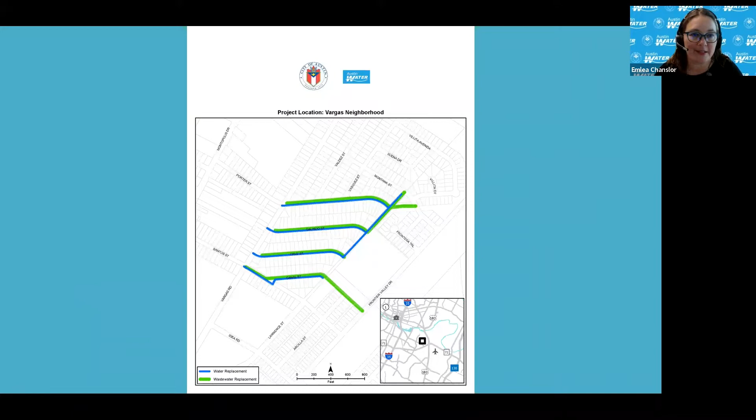On your screen, you should see a project site map of the location that we are going to be working on. The lines in blue are the water replacement lines, and the lines that are green are the wastewater replacement lines that we will be doing. I'm going to briefly talk about the project, and first I want to go over the actual street locations so that the residents are aware of what streets we will be impacting.

So we're going to be looking at the homes, the residents on 6,700 to 6,814 Canal Street, 6,600 to 6,705 Santos Street, 6,600 to 6,816 Cruz Street, 1,200 to 1,305 Lawrence Street, 6,600 to 6,825 Porter Street, 6,600 to 6,814 Galindo Street. So if you live within one of the residences or homes located within those street addresses that I just mentioned, that is the location of this project.

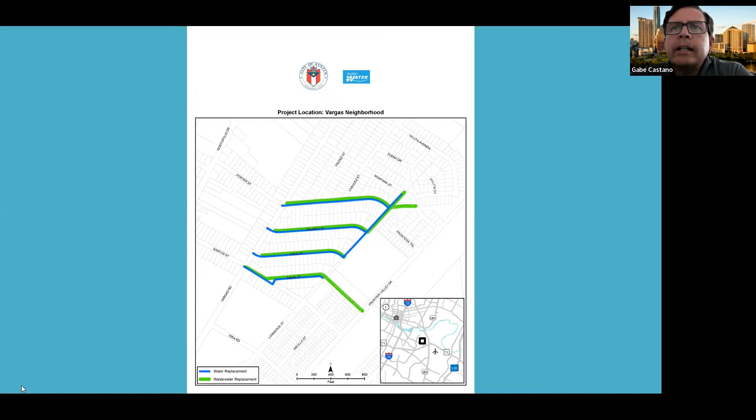So basically, we will be working on approximately 11,200 linear feet of 8-inch, 12-inch water and wastewater main pipes and lining 911 linear feet of 10-inch wastewater main. So our goal in this project is to replenish and replace existing infrastructure that is out of date and bring it up to new standards for the residents in this area. So we will be working on these streets to replace the water and wastewater.

So this project will primarily replace and update approximately 5,876 linear feet of water and 5,325 linear feet of wastewater lines. In addition, 12 fire hydrants will be replaced and some will be replaced in new locations to meet current spacing requirements. Construction is expected to start in August 2022 and will take approximately 13 months to complete. Roads will be resurfaced after construction is completed.

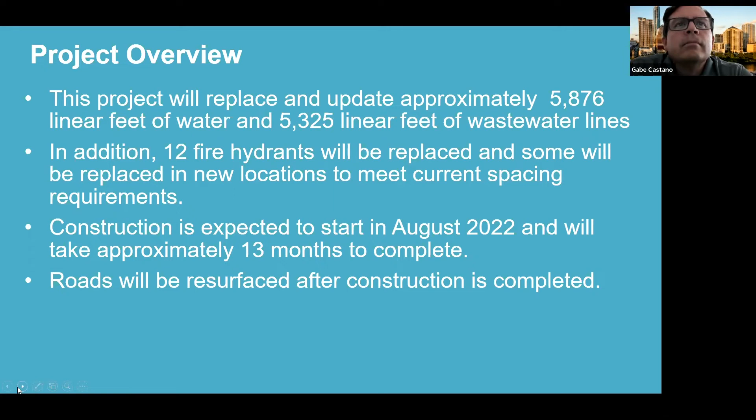And also, as I mentioned a little bit earlier, we'll be doing cured in place pipe lining, which means we actually will leave that line in there and we'll put brand new infrastructure within the existing pipe, so as not to disturb the ground, and also any of the residents or existing utilities that are around that pipe.

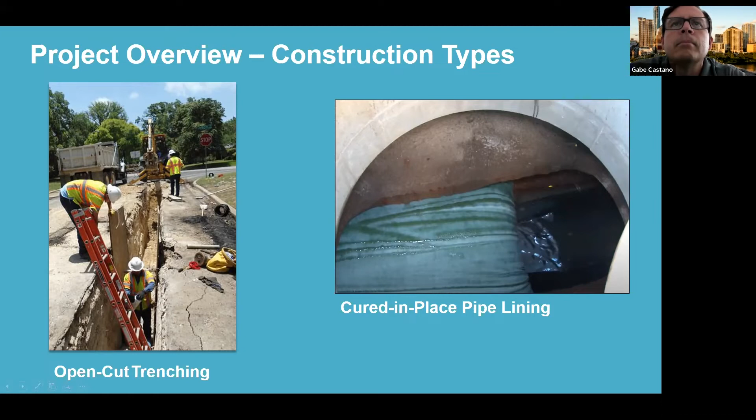So what to expect during construction? So, construction overview: the contractor will use heavy equipment to dig trenches for the new water and wastewater lines. The roads will be patched after the line is installed. All roads will be repaved at the end of the project.

During the construction phase, crews will work in front of your property a number of times to complete each phase of the project, including excavation, pipe installation, temporary paving, testing, repairs, if necessary, and final paving.

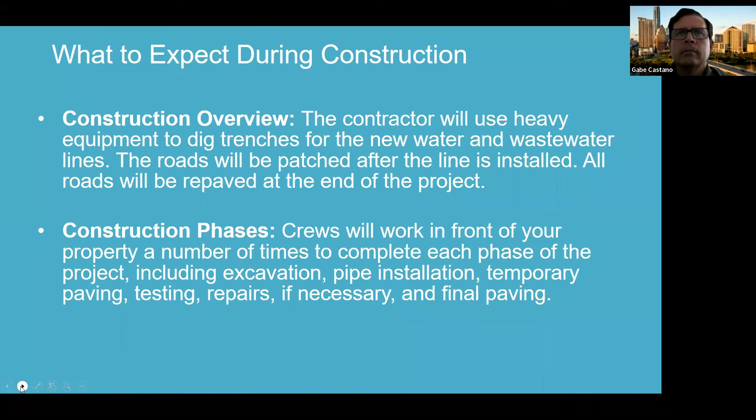And most of the work will be limited to the right-of-way. In many cases, the right-of-way is located 10 to 15 feet behind the curb in an area that you may consider to be part of your lawn. It may be necessary for you to remove landscaping or other personal items in the right-of-way before your new service lines are connected.

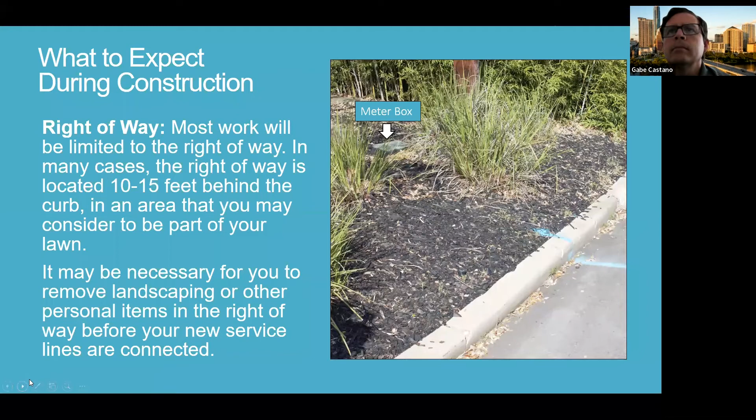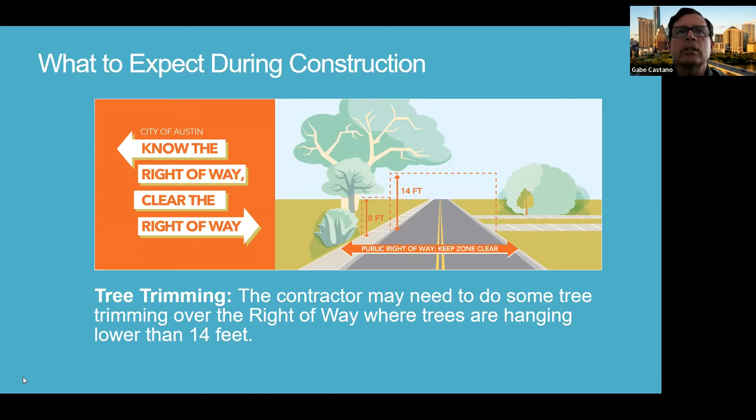Another thing to consider during the construction phase is traffic. Streets will be closed to through traffic during construction. Flaggers will allow access for residents. Streets will typically reopen at the end of each workday. You will always have access to your home. For brief periods, driveway access may be limited.

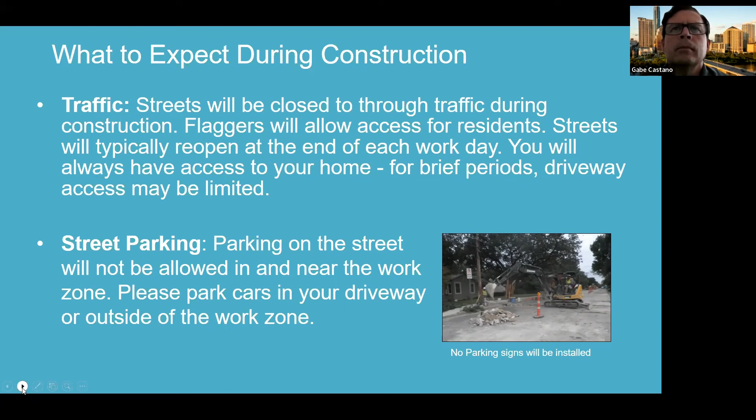Another thing to consider during the construction phase is the utility service. At some point, your water and wastewater service will be temporarily interrupted to connect to the new line, but most likely just for a few hours on a single day. We will notify you by flyers posted on the door prior to turning off the water.

Emergency outages are possible should a water line break during construction, and we'll make sure to notify you if that occurs. The work hours for this project are generally 7 a.m. to 7 p.m., and weekend work will be scheduled as required.

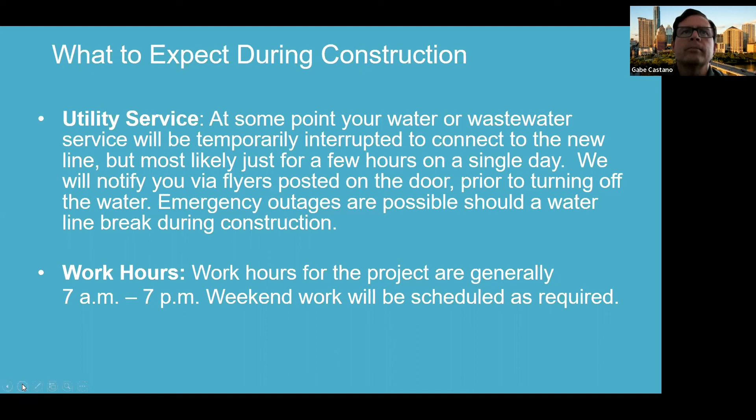Project communications, I'll hand this over now to Emily. Thank you, Emily. Thank you so much.

Thanks for that overview. I would ask anyone who's tuned into this to go to our project website. That's austintexas.gov/Vargas. So there's a project map there, there's a fact sheet; a lot of the information we've discussed tonight you can find there. And also there's a place where you can sign up to get email updates about the project. And that will be our primary way to provide information to residents during the construction. We'll also post on Nextdoor when we can.

And then, as was mentioned, if a water service outage is planned during the project, then we will distribute notices on front doors with 48-hour notice. There can be unplanned outages because we are working in areas with older infrastructure.

So that concludes our presentation tonight. I want to just end with our project contact information, which is also on our project website. We're here to provide information and respond to any concerns. Our project manager, our project inspector, and then me as the community outreach representative will be your main contacts.